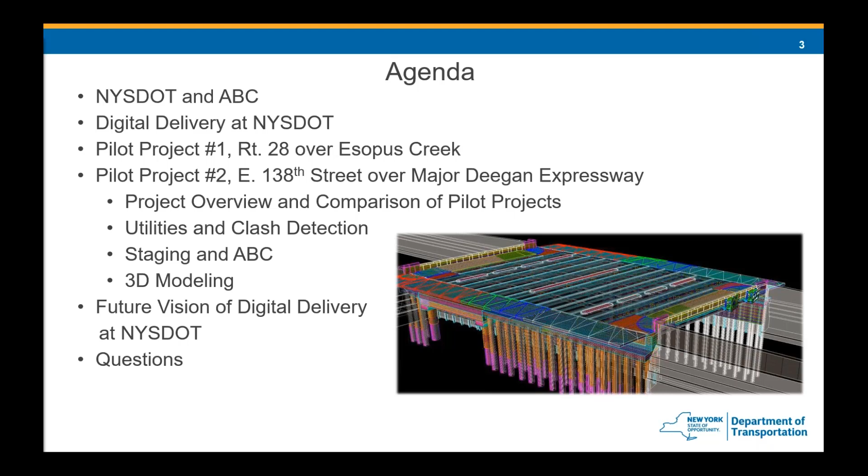On the agenda today, we're going to be talking about New York State DOT and accelerated bridge construction in general. Then we'll get into digital delivery at New York State DOT, including two pilot projects. The first one was Route 28 over Esopus Creek, which is now completed, and Brenda Crudele will be presenting on that. Then we'll get into pilot project number 2, East 138th Street over the Major Deegan Expressway, which is currently in construction. Julianne will talk about a project overview and comparison of pilot projects, utilities and clash detection, which is really interesting, staging and accelerated bridge construction, and 3D modeling. We'll get into the future vision of digital delivery at DOT, and then we'll open it up for Q&A.

I'd like to give first a brief introduction on the Structures Office at New York State DOT, and I always like to talk about our mission when we start off talking about structures. We do have oversight on the structural portion of the department's capital construction and maintenance programs, and we are always focused on safety.

New York State DOT is located in New York, of course. New York is in the northeast quadrant of the continental US. There are 11 New York State DOT regions. The main office, New York State DOT Office of Structures, is in Region 1 in Albany, New York, and we do have oversight on all the other structural portions throughout New York State. New York is unique in that it borders not only the Great Lakes and Canada, but also the Atlantic Ocean to the southeast.

Within the Office of Structures, there are 4 distinct bureaus that I have oversight on. There's the Structures Design Bureau, which Brenda Crudele leads. It's staffed with about 60 engineers and technicians, and they design a variety of structures from simple to complex, not only bridges, but also culverts and various other structures. Then there's the Structure Specialties Engineering Bureau, where Brenda Crudele is right now doing double duty, and that's essentially our construction bureau. We have our metals unit, fabrication and construction, concrete fabrication and construction, handling construction issues in the field, and also our hydraulics unit.

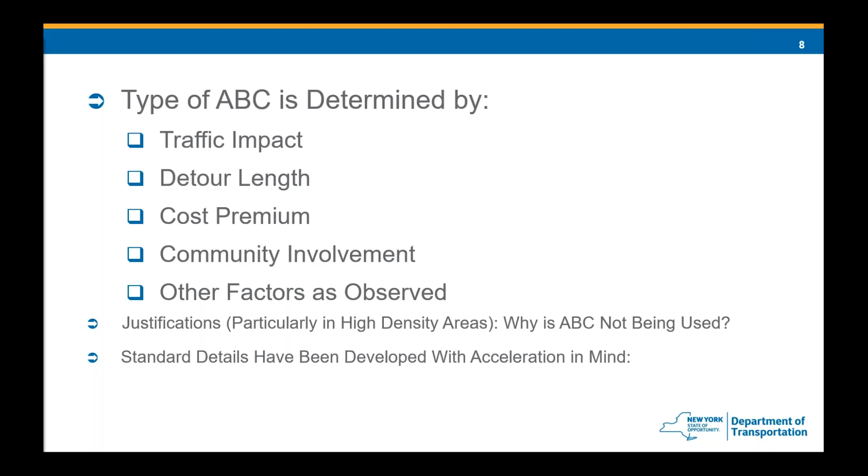We have developed standard details with acceleration in mind, and we'll go through some of those details now. Probably one of our preferred details is the integral abutment standard.

What makes this accelerated is that compared to a conventional cantilevered abutment, you don't have a footing, it's rectangular pours, we don't have to deal with pedestals, and it's very straightforward construction. You put the piles in and do a few pours, put the beam in, and then you're onto your deck and approach slab. So through reduced pours, it accelerates construction.

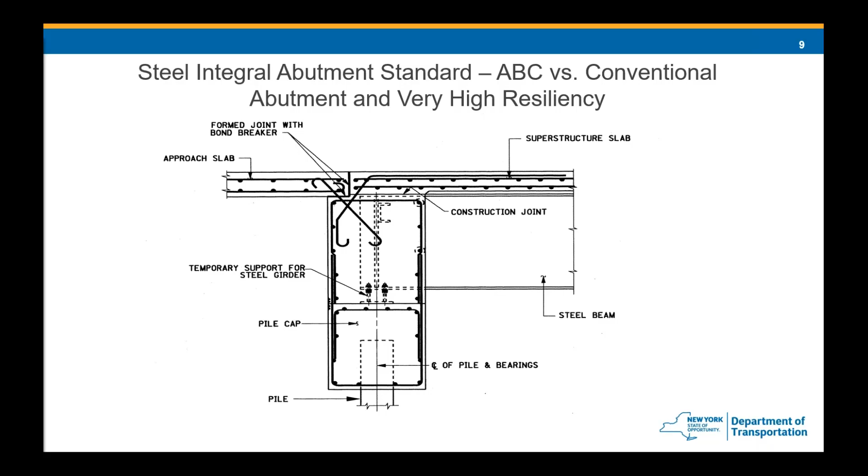What's very nice about this type of construction, and why we like it a lot in New York, is that hydraulic failures are our leading cause of bridge failure in New York State by far, and this is a very resilient structure. The superstructure is tied into the substructure, and it's been proven through flooding events to withstand those very well.

They are set, and then there's a closure pour put in place. Typically we will diamond grind, do a UHPC closure pour, diamond grind, and put longitudinal grooving into the deck at that point.

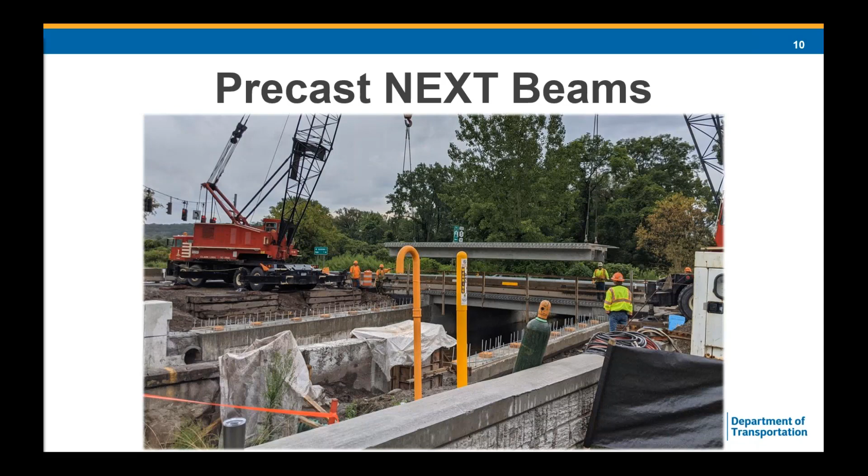You can note, and I'll show this in a separate picture, how tight those joints are at the connection areas where the UHPC will go, due to the inherent nature of UHPC bonding so well. We can use shorter bond lengths for the rebar development lengths, and then use tighter closure pours.

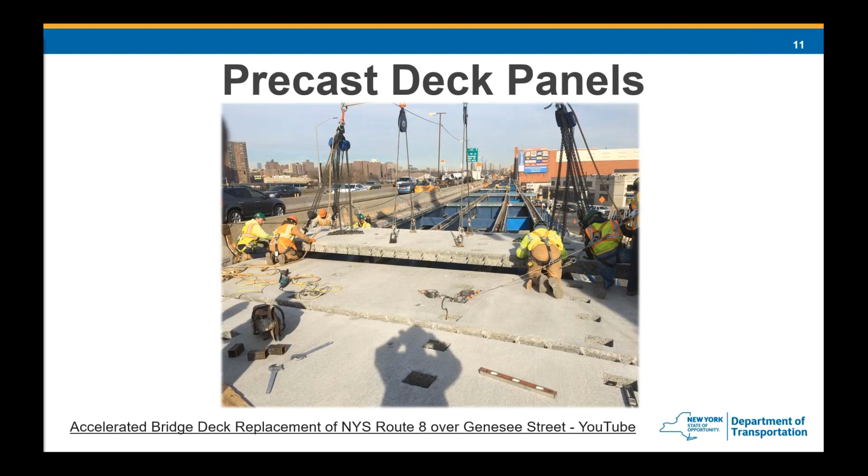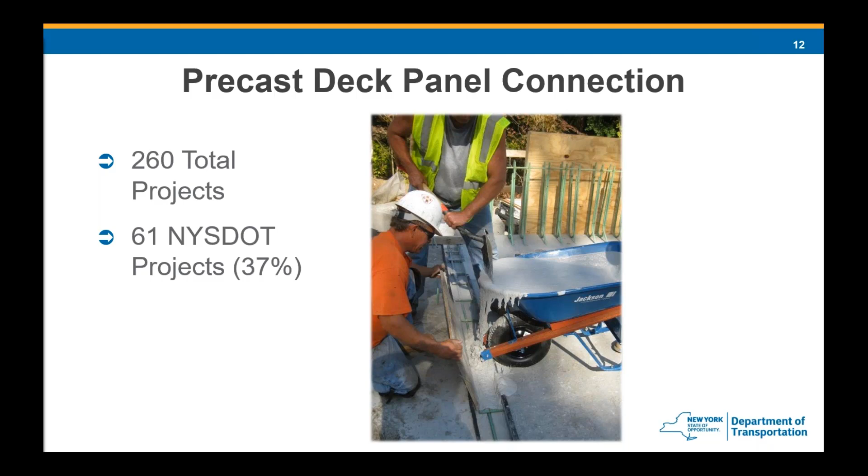They're delivered to the site and erected in a similar fashion as the NEXT beams, where they're set side by side and closure pours are put in place. Typically we diamond grind, longitudinal groove, and then we're ready to go.

One of the more unique accelerated bridge construction things we've done in New York, which is kind of neat to highlight, is our roll-in or slide-in superstructures. We've done a few of these. It requires assembly adjacent to the structure, and the ability to construct and demolish under traffic or additional closures.

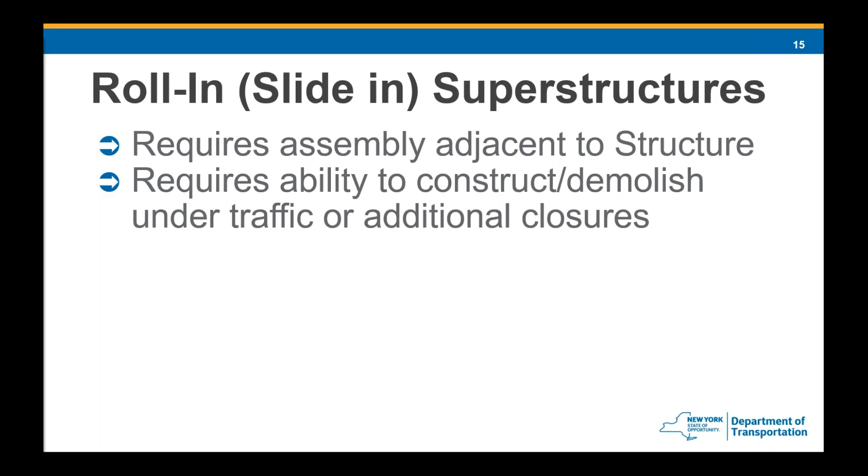They kept one direction of the interstate open while they diverted traffic onto a state route around this project on the weekend. There was a lot of public information outreach ahead of this. It was very successful on both slide-ins, and each project was completed in a weekend.

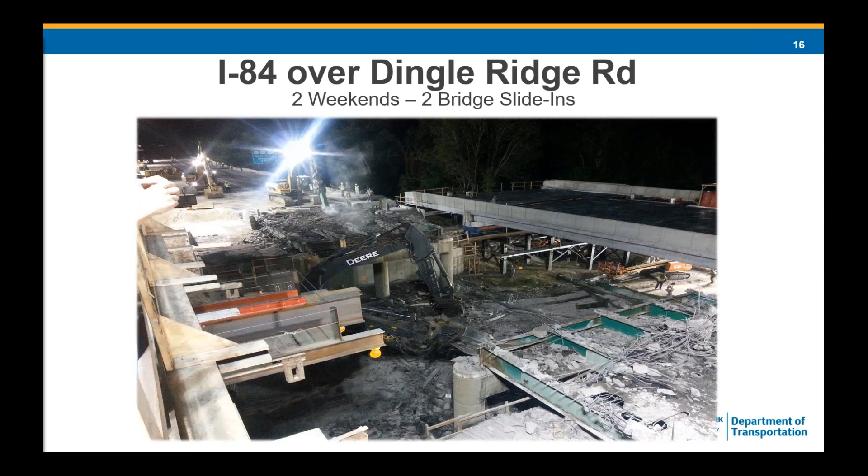Thanks, Jim. So now we're going to jump into digital delivery at New York State DOT. Starting off, what is digital delivery?

We're all very familiar with the current process of how in design we model our bridges and highways, we create 3D models, and we use that information to create our 2D PDF plans that the contractor uses to bid on. They bid on that information, and then a lot of times they recreate their own three-dimensional information from the 2D plans to construct the project.

So what digital delivery is for us, it's being able to specify contractual work with a variety of relevant electronic files. So instead of taking our smart information and dumbing it down and flattening it to plan sheets, we're making the electronic information models the legal contract document and giving that directly to the contractor.

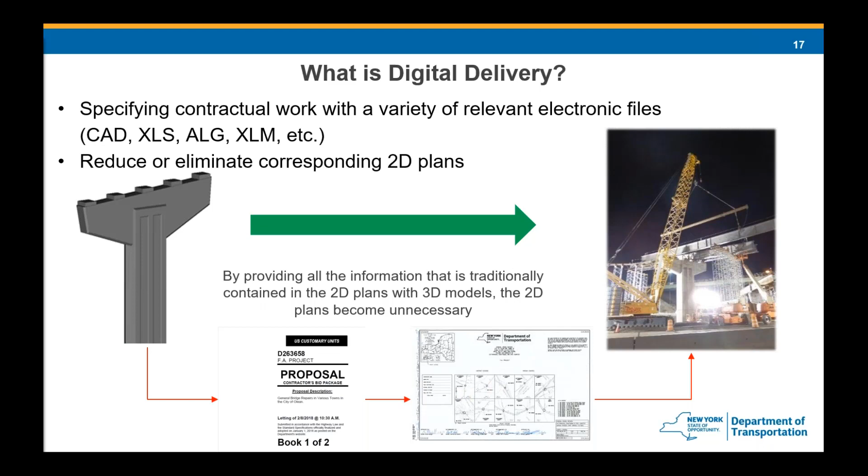We started this at New York State DOT back in March of 2018, where we formed our model-based contracting committee with the following objectives: we wanted to see what other states were doing, identify issues we'd see with progressing a model-based contracting project at New York State DOT, determine our goals, and attain executive approval to move forward.

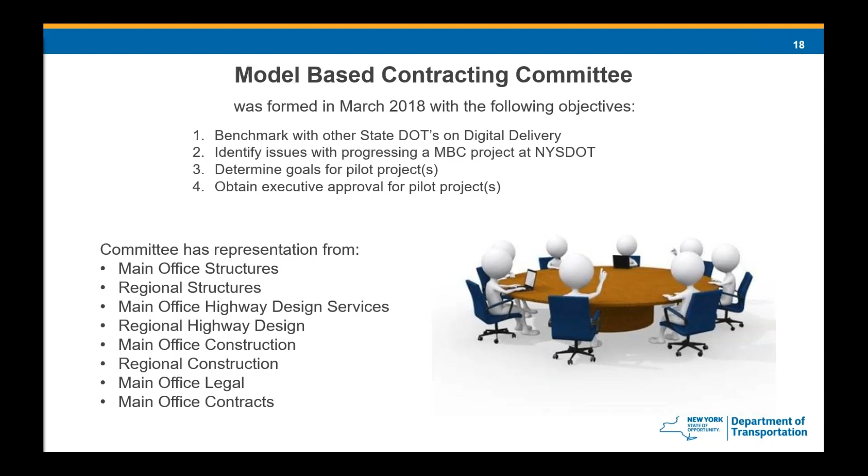One of the big things I like to point out is that we had representation on the committee throughout the whole department. We had main office and regional staff involved, staff from structures, highway design, office of construction, our legal folks and our contracts folks were all involved in the committee so that everybody had a say in what we were doing.

The two goals we had for our pilot projects: the first is to create a process to include the models as the legal contract document. That's something we've accomplished with our first pilot project. We like to check that one off — we always like to finish things in committee, so that's something we've accomplished.

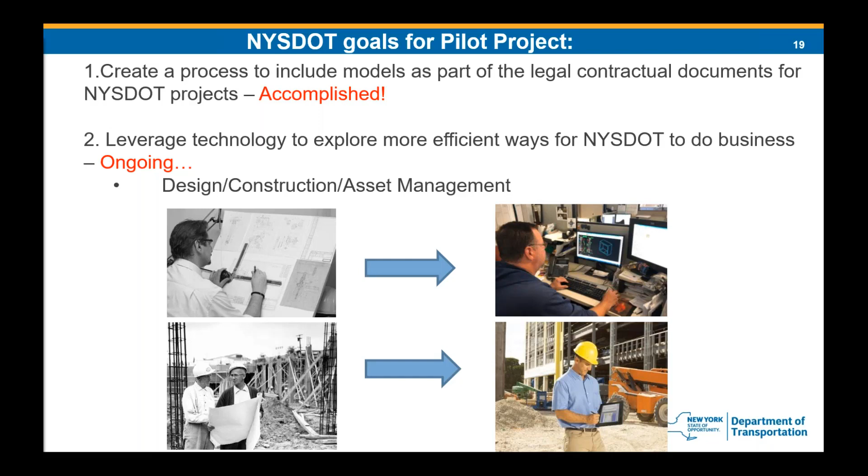Our second goal was really to leverage technology to explore more efficient ways for us to do business. That's not as easy to mark as checked off — it's an ongoing goal that continues to change, and we're really looking to focus on moving our information from design to construction and then into asset management.

Our first pilot project was the bridge replacement of Route 28 over the Esopus Creek, located in the Catskill Mountains in Lower New York. Our design schedule took place in 2018 and 2019, it was awarded to the contractor in 2020, and construction took place in 2020 and 2021.

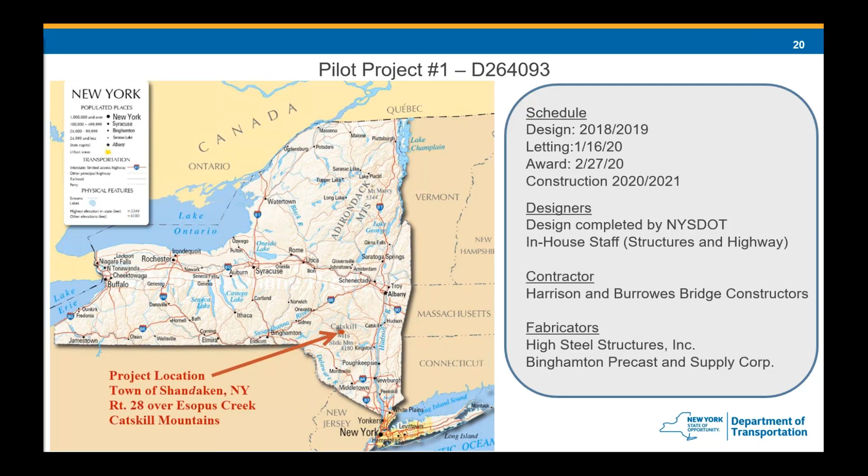I like to point out that the design for this project was completed with all in-house staff, both structures and highway design. We really wanted to dig in and learn the digital delivery process and develop it ourselves. A lot of other states have hired consultants to do that work for them, but we really wanted to lead the effort internally at DOT.

So you might ask yourself, how do we make that information model the legal contract document? We went about this in a pretty simple way — we changed the definition of the term 'plans' in our contract. Currently, the definition of plans is the official contract drawing, which shows the location, character, dimensions, and details of the work to be performed. That's in all of our contracts.

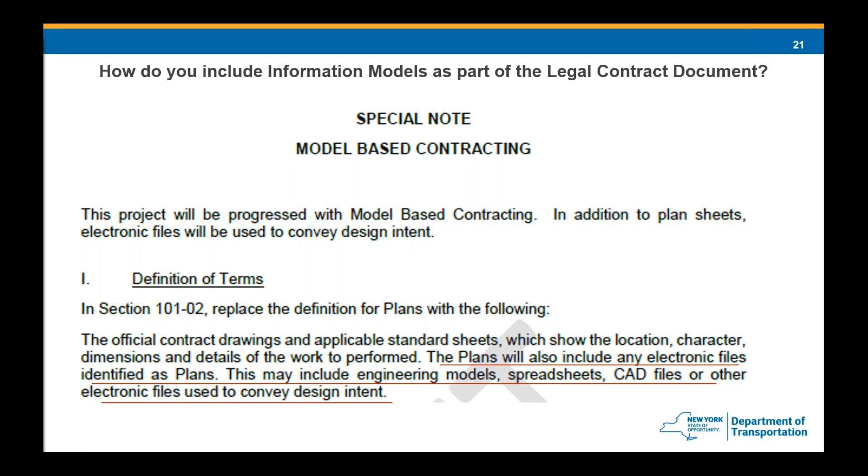What we added for our digital delivery contracts is that plans will also include any electronic files identified as plans — this may include engineering models, spreadsheets, CAD files, or other electronic files. The idea here is we wanted to leave ourselves the flexibility to specify any electronic file we wanted as the legal contract document.

So what we did is we looked at all of the components of a project and asked ourselves, what is the most efficient way to transfer this information to the contractor? So you have plan sheets, physical models, or data models. Looking at all the information we give to the contractor, we decided that all three of those are good ways to transfer different information.

So we ended up taking a hybrid approach with our project. We looked at each component and essentially did a return on investment of what is the best way to provide that information. The example I like to pull out and show is bridge railing.

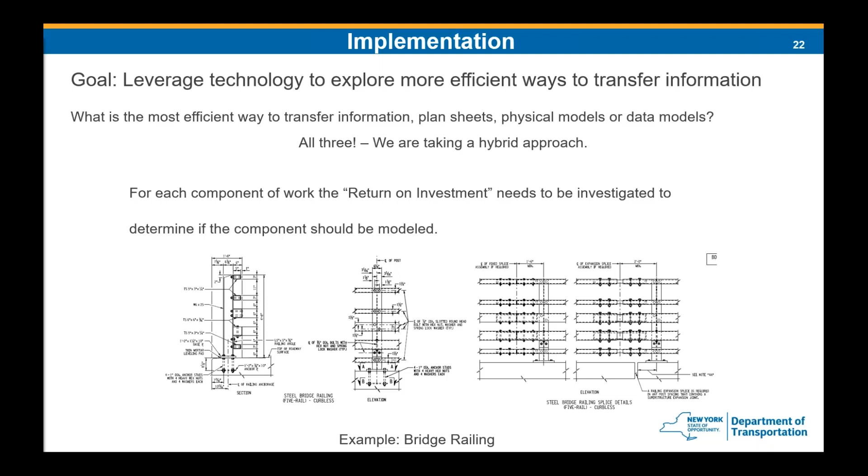We have standard details for our bridge railing that our fabricators have been using for decades. We could take the time and model every nut and bolt on that railing, but they're just going to go back to our standard sheets anyway. So we didn't feel that was a good use of our time to model that when we know they're going to use our standard detail anyway.

On the highway side, all the project geometry, horizontal and vertical and super, all the highway corridor, the pavement, sidewalk ramps, all the earthwork quantities, and then our utilities and closed drainage.

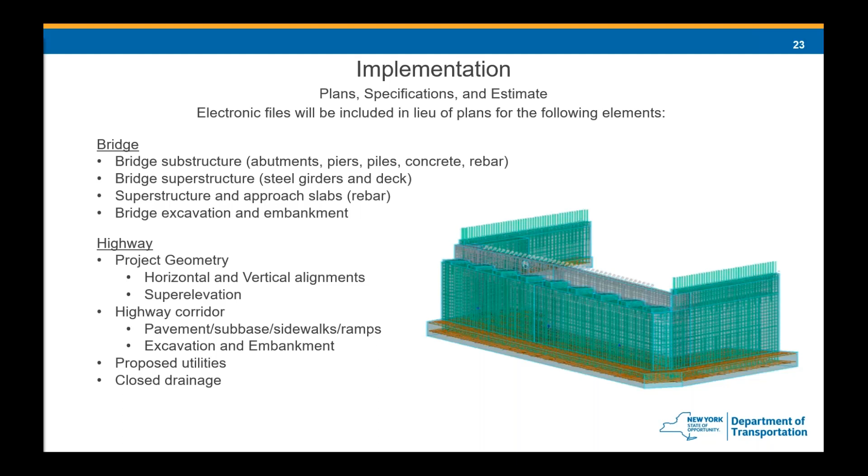The components of the project that we thought were still a good way to transfer information is plan sheets, title sheets, PE stamps, index, notes, tables, right-of-way, railing details. So we went through and these are the things that we still delivered as plan sheets to the contractor.

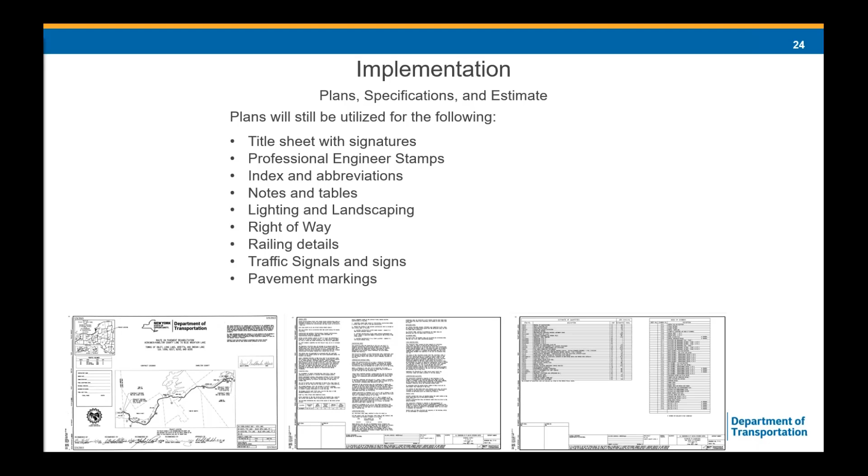So how did we essentially assign files to be electronic files identified as plans, like we said in the definition? We ended up having a new plan sheet that we added to our set, called electronic files identified as plans. We listed out each file that was contractual, and most importantly, we added a date and time stamp for each file. There was a lot of discussion on how you know whether you have the right file. This is how we addressed that - each file came with that date and time stamp, and it had an engineer of record along with it.

We also included a special note with our projects. You can imagine that if you're looking for certain information on the bridge, you know where to go in the plans to find it - you don't need special instructions to tell you where that is. But in a model, this is all new to everybody.

So what we did was we went through and gave specific electronic file content for each of the following components of the bridge.

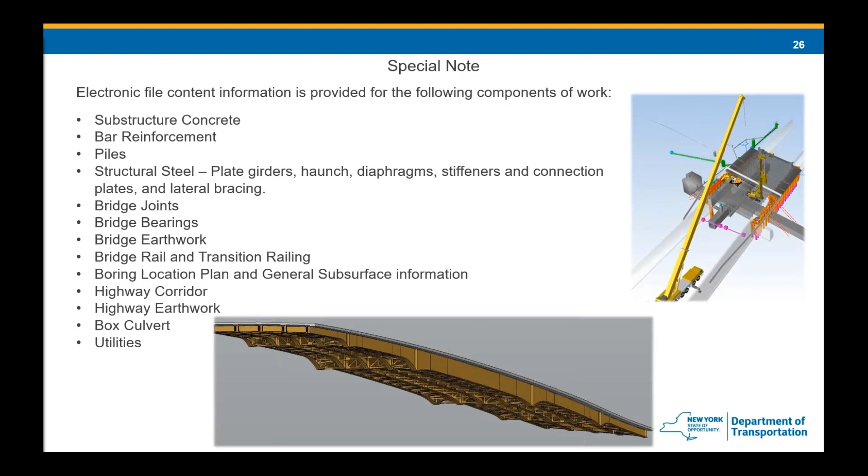One example I show here is for the structural steel. So what we do is go through and essentially tell them what information they can find in the model. In this case, girder plate thicknesses, plate lengths, diaphragm types, gusset plate thicknesses - that information is all included in the model. But almost more importantly is the information that you can't include in the model.

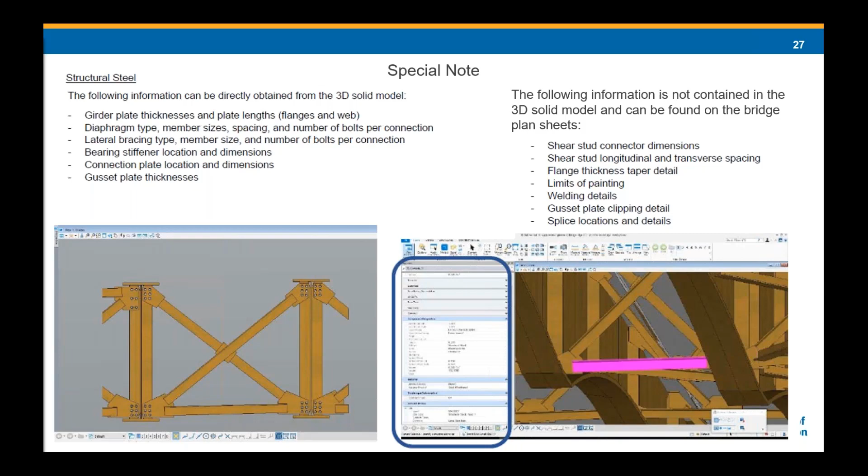Stud shear connector dimensions and spacings, welding details, splice locations were not included in the model, and those were provided on plan sheets. So we found it was very important to include this special note for all the components of the bridge so that people can find the information that they need.

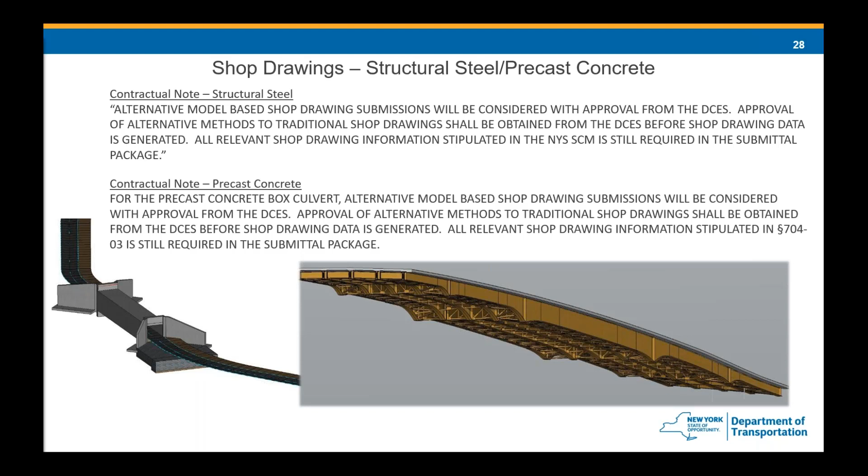One thing we were looking to see was if the fabricators were also interested in model-based shop drawings. This project had the bridge, and we also had a precast culvert in the contract. So we included a note in the plans that allowed the fabricator to submit model-based shop drawings back to us if that was their preference. It turned out neither fabricator did that. We got standard 2D shop drawings, but we did allow for that innovation if the fabricators were ready for it.

So how do we end up delivering the same information in the model as we would in the plans? The contractor still needs all the same information, we're just delivering it and packaging it in a different format.

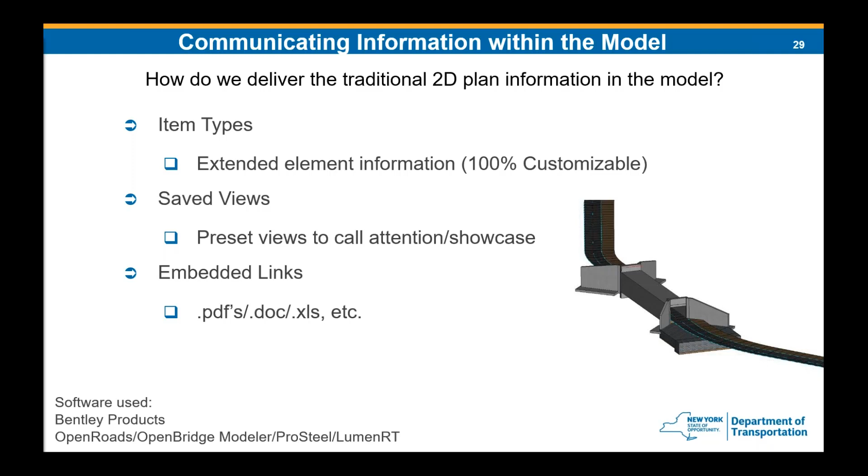We did this three different ways throughout the model. There's a function called item types, which allows us to attach metadata to information within the model. We had saved views, which allows the user to call up preset views. And then we had embedded links attached to other files.

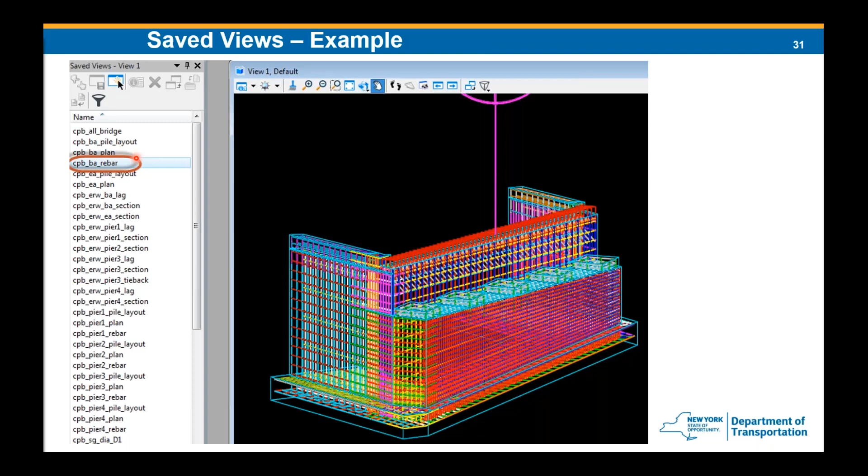The next is Saved Views. When you jump into this full model, it can be overwhelming, there's a lot going on. So being able to pick out a particular view where it turns everything else off in the model is super useful. Here you click on Begin Abutment Rebar, and now you just have the begin abutment and the rebar in that, so you don't have to be distracted by everything else in the model.

So I want to talk briefly about contractor outreach that we did for our first pilot project. We knew this was very different for our contractors, and we wanted to give them a heads up and make sure they knew it was coming. So we had 4 in-person meetings that were simultaneously webinar held prior to the advertisement of this project.

Our plan specification and estimates were due into our Design Quality Assurance Bureau at the end of September 2019. One of the most important things we did for this project is we posted our PS&E information online on our contract website prior to advertisement, about 2 months prior. Based on our AGC meetings, we let everybody know we were going to do this. This gave contractors an extra 2 months to see the files, become familiar with the project, and they could have started estimating 2 months earlier if they wanted to, prior to the actual advertisement of the project, which was in December 2019.

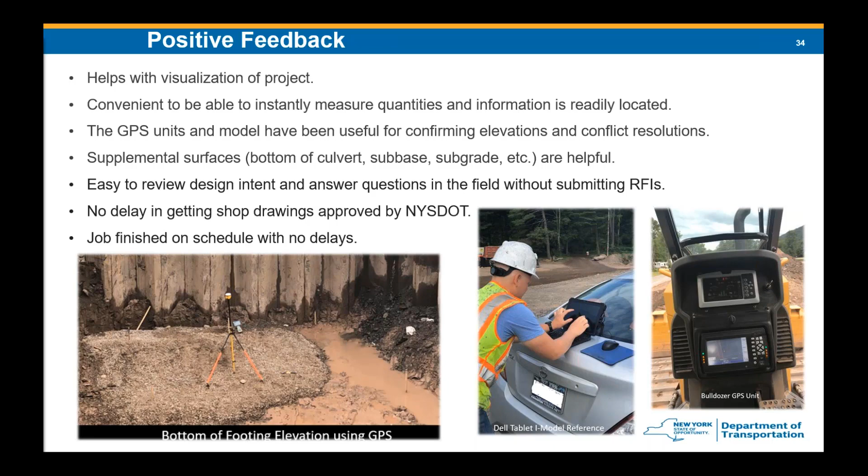The GPS units they used were great for confirming elevations and resolving conflicts. The supplemental surfaces, like bottom of culvert, sub-base, subgrade, were really helpful and went into the machines very well. We were told it was easy to review the design intent and answer questions in the field without submitting RFIs. We saw no delay in getting shop drawings approved by New York State DOT, and the job was finished on schedule with no delay.

Some of the lessons learned that we had: we found out that Bentley is not completely interoperable with AutoCAD. Some of the fabricators were using AutoCAD instead of Bentley, which is what we used for our information models. We found that bouncing back and forth between the model and the plans can be confusing.

There is a lot of information provided in this contract, and again, we weren't sure if all of the information was being fully utilized because there was a lot of information. The contractor was very interested in more than just a finished grade model.

They would have been more happy with a construction staging model and different sequences. So once they got into using the surfaces, they really liked those. One thing that we heard was the deck cross slope is not very easy to get out of that model, and some software with the capability of cutting cross sections would have been really helpful.

We found too that we need construction staff out there that are comfortable with reviewing and using the model to obtain information. We knew that going in, and we made sure to staff accordingly out in the field, but it was very obvious that construction staff need to be able to use the model.

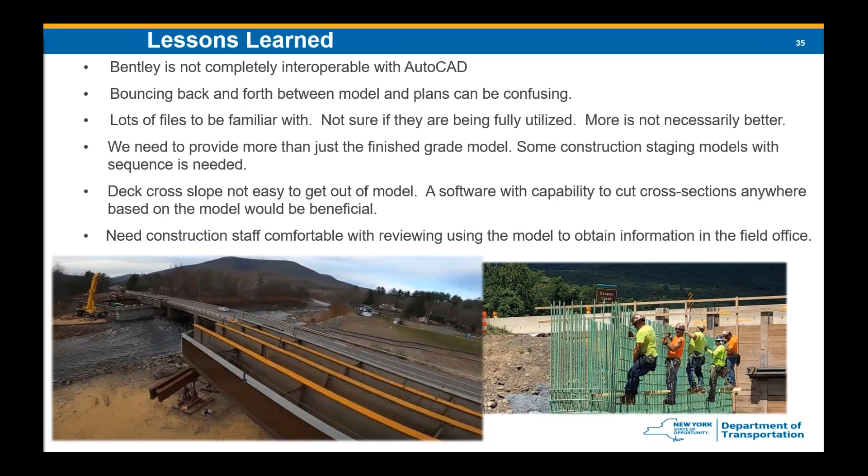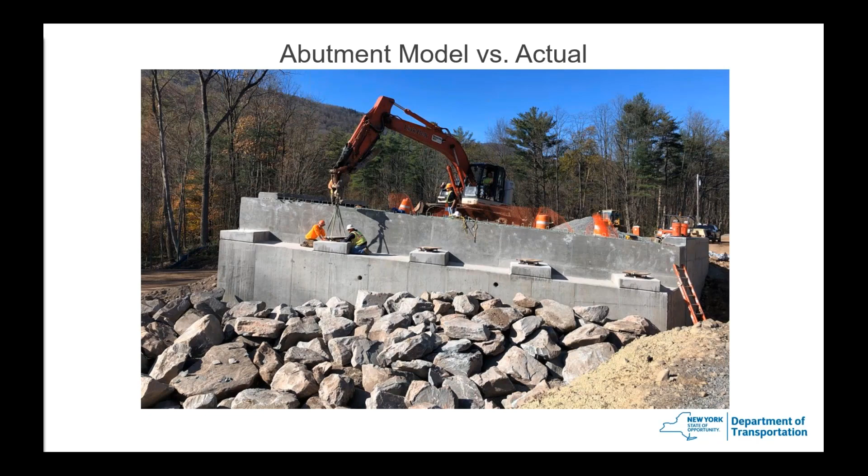So we like to call this project our proof of concept. You can say that the project was biddable and buildable. We got the product that we wanted out of this. Like I said, we came in on time and on budget, so we were very happy with the completion of our first pilot project.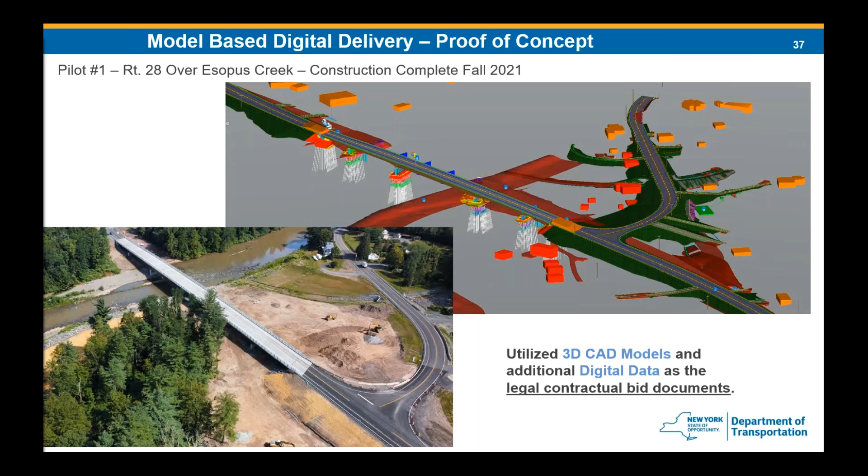Good afternoon, everyone. Now I'd like to switch gears and talk about our second pilot project, for East 138th Street over the Major Deegan Expressway. So as you can see, I like to show this photo that compares our two pilot projects. The Route 28 over Esopus Creek, you can see it's a very rural setting, with a lot of space for staging, for work zone, everything here.

And then looking at our second pilot project, very tight quarters. There's a lot of utilities and staged construction that really mandated the use of accelerated bridge construction techniques for this project, where we used modular deck beams.

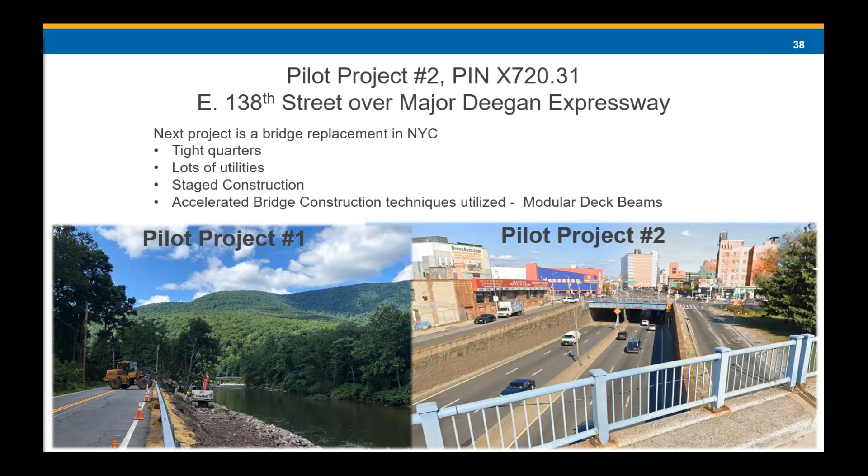So here's an overview. This is located down in New York City in the Bronx. The design schedule was designed in 2020. Contract was awarded middle of 2021, and construction has begun and is expected to last through 2024.

And just like our first pilot project, we're very proud to say that this bridge replacement was designed with in-house staff, with the Office of Structures and our Office of Design for the Highway Group. But we did bring on a consultant to help with the utility relocations for this project.

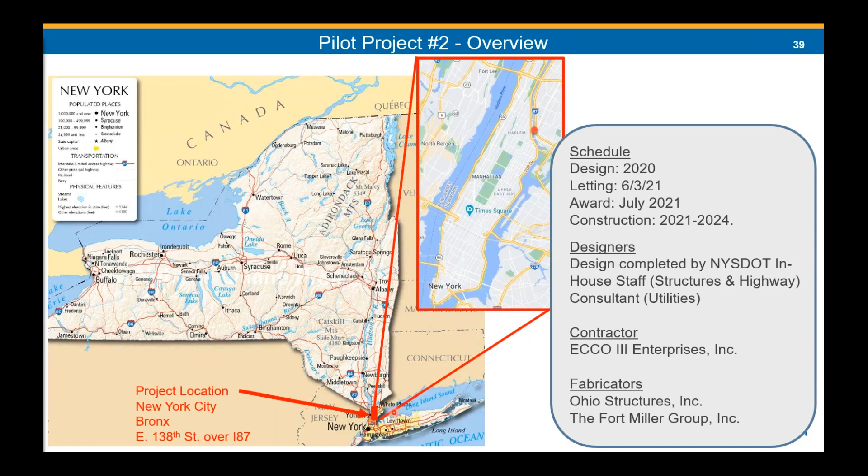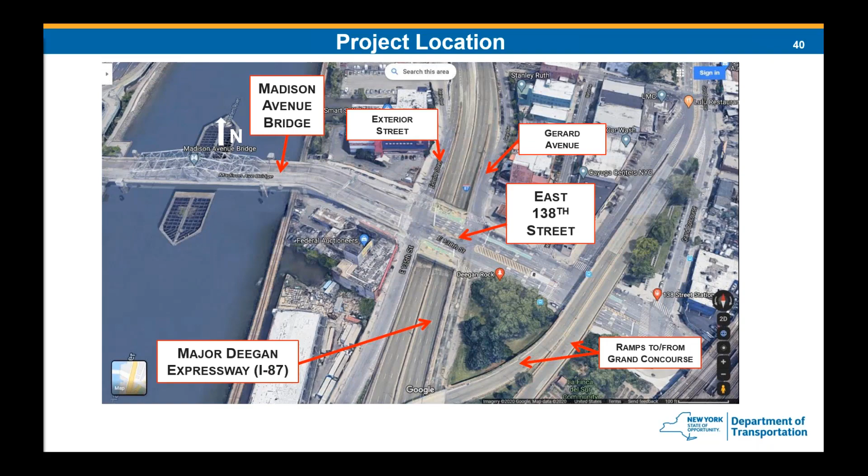So here's an aerial view of the existing bridge. This is East 138th Street. It crosses the Major Deegan Expressway, and it is just 25 feet from the approach to the Madison Avenue Bridge, which is one of the few free entry points into Manhattan, seeing more than 150,000 vehicles per day.

The existing bridge is a two-span steel girder structure built in 1938. The existing bridge has very limited vertical clearance over the expressway and has been hit numerous times. So the project goal here is to replace the existing bridge, eliminate the pier, and increase the vertical clearance.

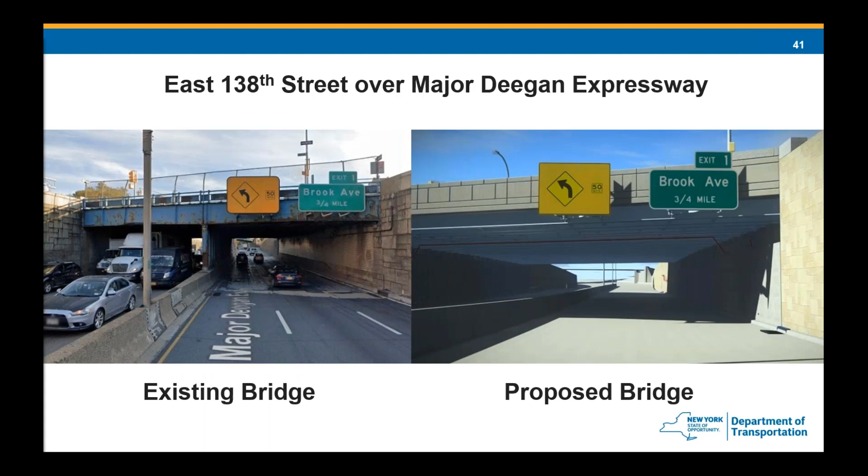And this must be accomplished all while providing for pedestrian access, keeping all lanes on the bridge and abutting intersections open during construction, limiting impacts to the various utilities, and providing aesthetics that tie into the historical character of the surrounding area. The second pilot project was challenging from nearly every aspect, and it really was an ideal candidate for model-based contracting, given the amount of coordination and clash detection that is necessary for a project of this scale.

With so many site constraints and strict geometric controls, the East 138th Street Bridge may look very uncomplicated at first look. However, there are many complex traffic, utility, geotechnical, and structural design challenges that needed to be overcome to ensure the success of this project.

So here is our bridge. It is actually much wider than it is long. It provides for accessibility to 6 lanes of traffic, along with bike paths and sidewalks to accommodate the high pedestrian demand in this area.

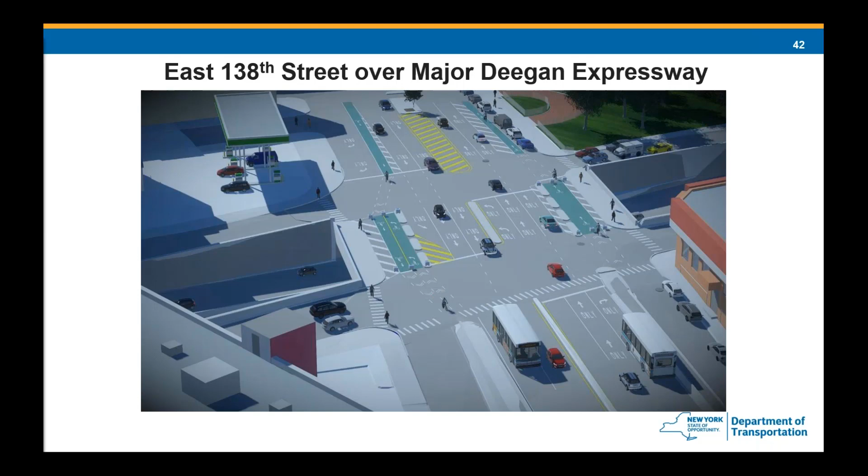The site is equally congested below ground as it is above ground, with a very complicated web of utilities. Really, there's every type of utility imaginable within the project limits.

So you can see this is our bridge here, with our girders running in this direction. We have utilities carried across the bridge, including a combined sewer that runs below the abutment underneath the expressway to the other side of East 138th Street. We're going to go into a lot of detail later on about just how challenging it was to accommodate that sewer.

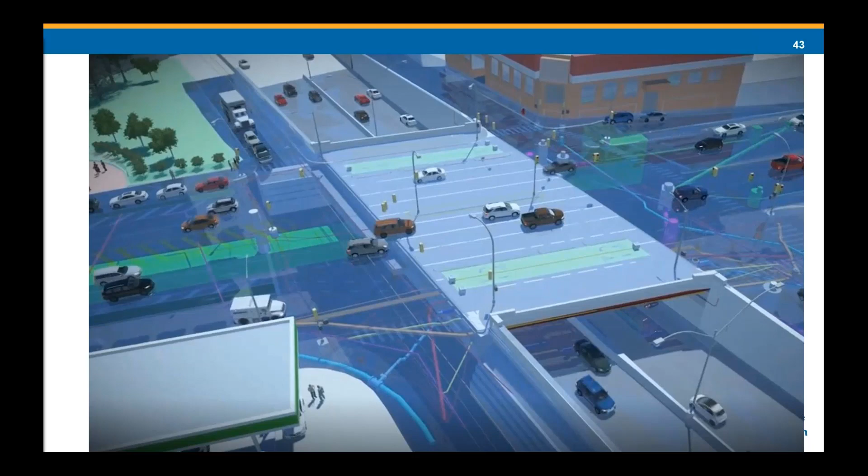Let's talk about some of the differences between our two pilot projects. The design for Route 28 over Esopus Creek, that was our first project, was designed in 2018, 2019, and construction was completed in 2020, 2021. During construction of our first pilot project, we started design for our second pilot project, and like we said, our East 138th Street project is currently in construction.

Route 28 was built in a very rural area with no underground utilities, in comparison to East 138th Street, a very congested urban environment with a sophisticated web of underground utilities. On Route 28, we only had two different agencies to coordinate with, versus down in New York City, where we had over 10 different agencies that needed to be coordinated through design and construction. Route 28 was built using a single work zone traffic control stage, while East 138th Street had over 10 different work zone stages to build the entire project.

And finally, one of the major differences between the two, like Brenda mentioned, for Route 28 we modeled all of the structural steel in 3D and transmitted that as contractual information to the fabricator.

One of the major changes we made was based on lessons learned. We reached out to the fabricators after the project was completed, and one of their recommendations was that they were very hesitant to use the 3D model for fabrication of the structural steel. In the 3D model, you need to go in and measure everything—flange thickness, flange transitions, plate widths, etc. So we heard them loud and clear, and because our second pilot project was in design during construction of the first one, we were able to make this change. We ended up using Excel spreadsheets to convey the contractual information for the structural steel on the second pilot project.

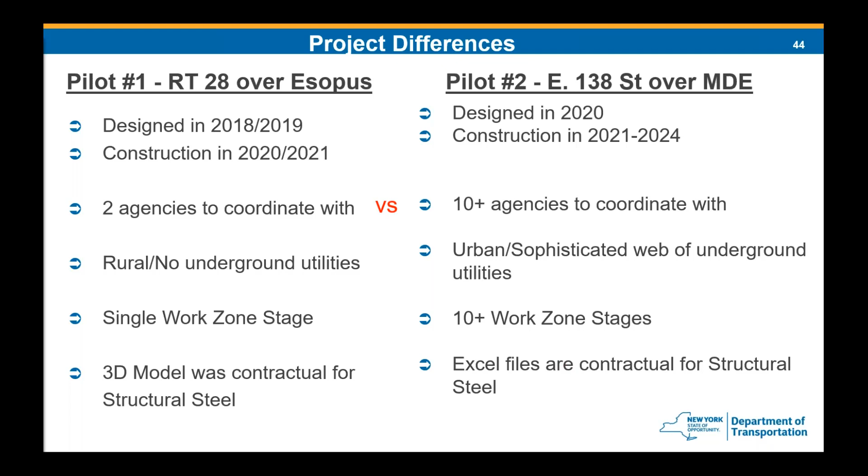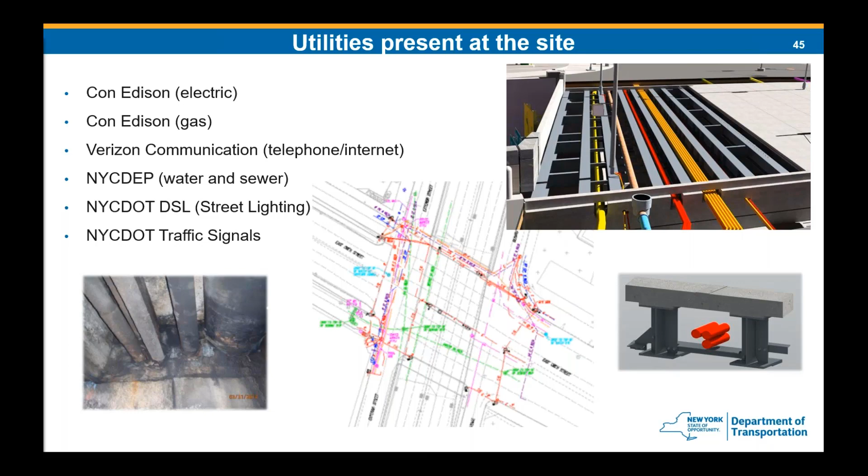Really what was very beneficial was using digital delivery for this. This is a conventional view, maybe what you'd see with utilities shown in 2D plans. At New York State DOT, we show all of our utilities in color to help bring out that line work so it's not lost with leader lines or other component information on the drafting plans. But even though they're shown in color, and you're not going to miss them, it's still very difficult to see where these are in relation to each other in space.

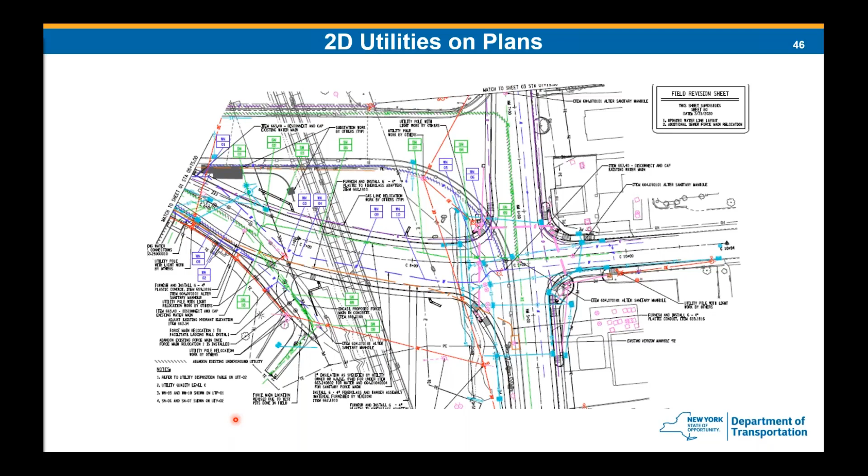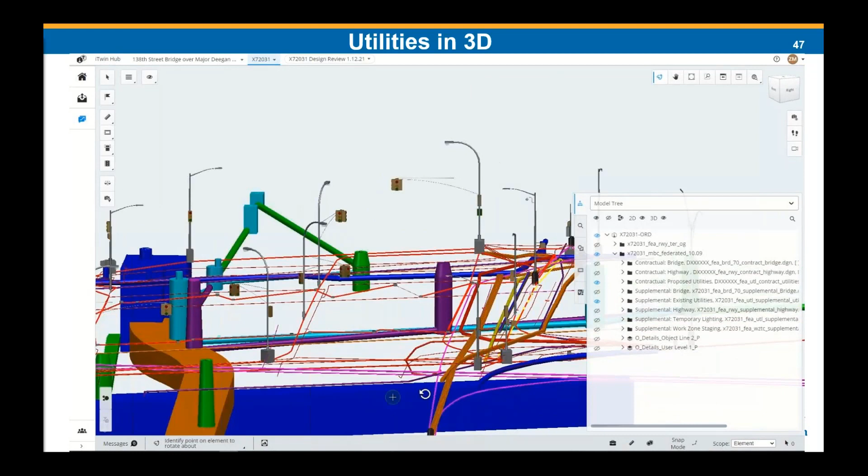So looking at how we modeled all of the utilities in 3D for East 138th Street, you can see we start with our overall 3D model, and you can start turning off different levels to really isolate the structural components you're looking for and the utilities, showing their locations relative to the bridge itself and relative to each other. This was extremely valuable for this project.

And one of the biggest takeaways that I saw as a designer being able to use 3D models for utility coordination is looking at clash detection.

So we coordinated very closely with the utility companies and the consultant on board helping us with the utility relocations. We had all of our meetings just like you would if working on a conventional 2D plan project. We double checked, triple checked our numbers, had sketches passed back and forth to review everything.

And the more conflicts and errors that we can correct in design, the less money you're going to spend and the less time it's going to take you to correct those issues rather than if you waited until the project was in construction.

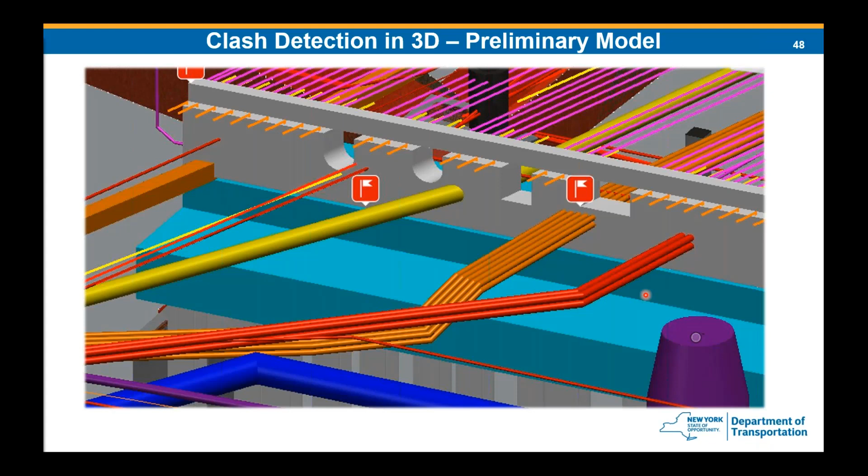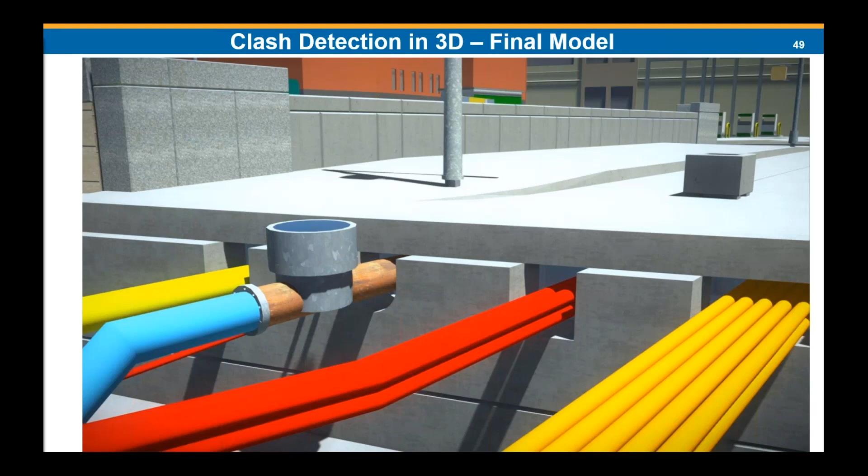Because this project is located in a tight urban environment and we had incredibly high traffic and pedestrian demand to accommodate during construction, it really proved to be a challenge for developing the staging for this bridge replacement. So what we ended up with is a staging plan that would replace the bridge in 4 independent stages over 3 years while using accelerated construction techniques.

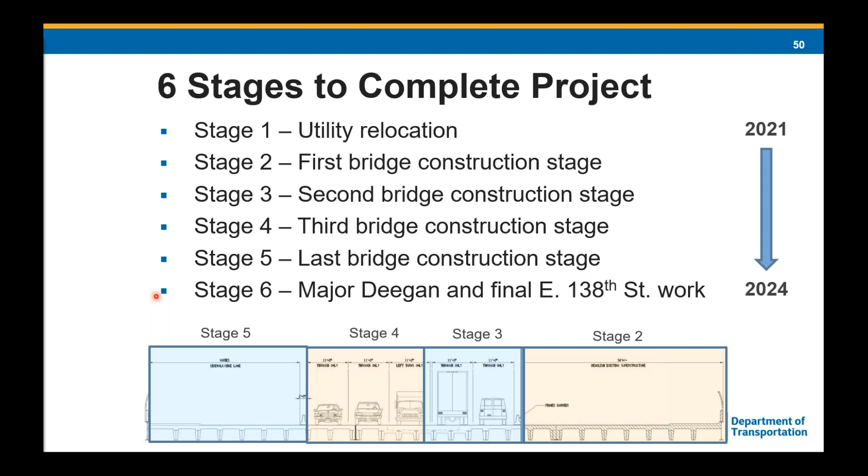So the first stage is that we're going to go out and do all of the utility relocations. Once the utilities are in their final resting place, then we can start our bridge construction, which would be completed in stages 2, 3, 4, and 5. Once the bridge is built, then stage 6 is the work along the Major Deegan Expressway and finishing any remaining highway work on East 138th Street.

So I want to talk a little bit about accelerated bridge construction and why that was very important for this project. Like Jim mentioned, any New York State DOT project in an urban environment must provide justification for why the project is not utilizing any accelerated bridge construction techniques.

And here in New York, we have a Drivers First initiative. So in September 2012, the governor initiated this new approach to prioritize the convenience of motorists and ensure that disruptions are as minimal as possible to drivers at highway and bridge projects across the state. So following our Drivers First initiative here at DOT, we decided to proceed with prefabricated modular deck beams with UHPC closure pours for this bridge replacement project.

So I know everyone here understands the advantages of accelerated bridge construction, but I just want to do a quick comparison here for the techniques that we chose for this project, and the alternative would have been conventional steel girders with a cast-in-place concrete deck.

So the first thing that we all know, it's right in the name, accelerated bridge construction. With prefabricated modular deck beams, you have very minimal cure time for UHPC versus the in-field application using cast-in-place concrete. You're going to have at least a 28-day cure time. So you have immediate savings there.

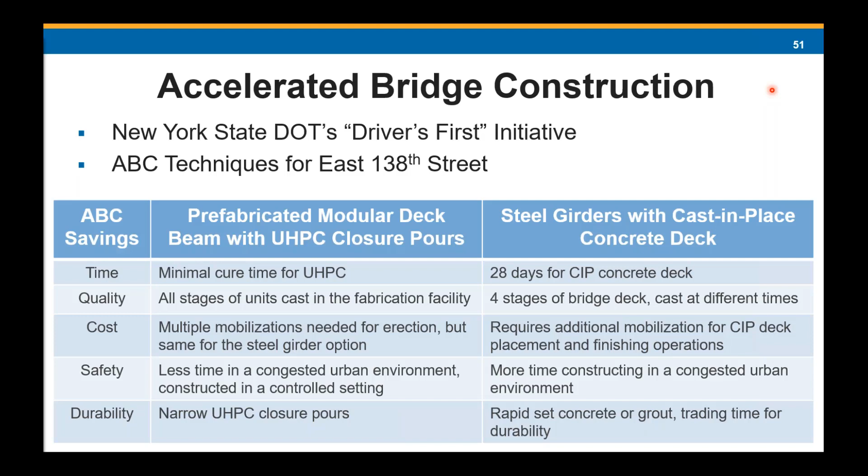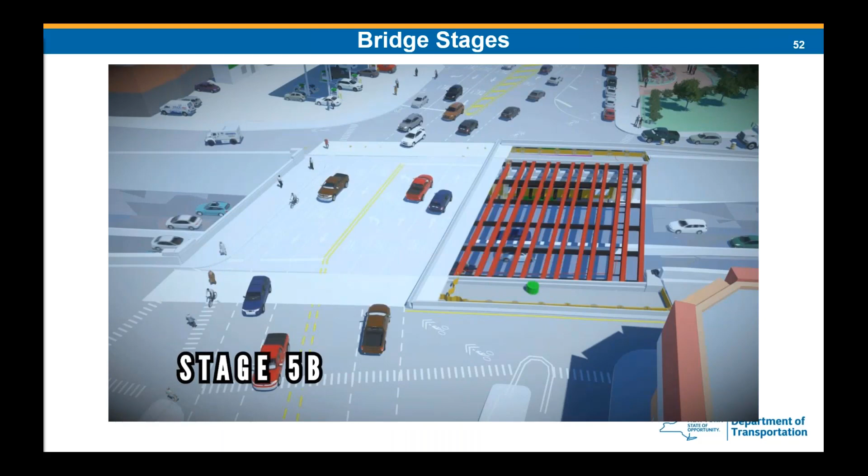Let's take a look at the staging here, the 4 bridge stages. In stage 1, we're utilizing the existing bridge to carry all of the traffic while we build the new portion. Stages 2 and 3, we're going to be utilizing traffic on existing and on the proposed structure. And finally, the last stage has the combined sewer carry beam system, which we're going to talk about soon.

Using these visualizations from our 3D models was very advantageous during the design. We were able to convey to project stakeholders exactly how traffic would be maintained, ensuring their buy-in and cooperation. The middle bridge stages were very narrow, which did add cost and construction time to the project, but it really allowed us to maintain our traffic, keeping all lanes open at all times.

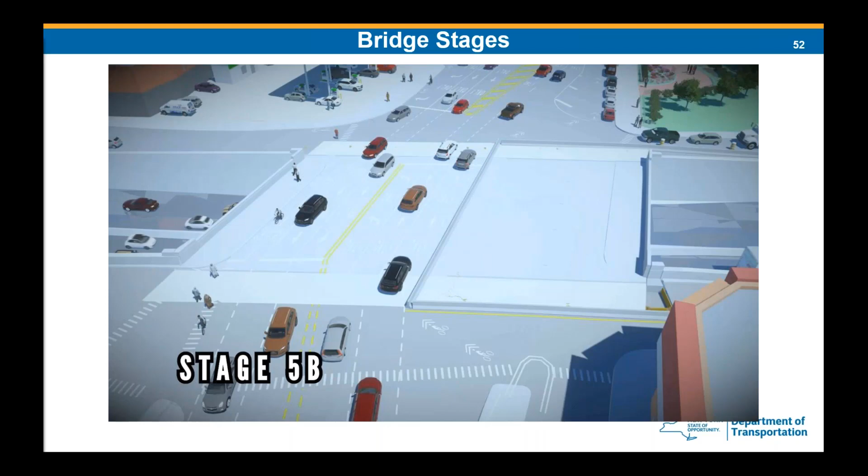Because we were using the prefabricated modular deck beams, that's 2 steel girders connected with a precast deck, then erected before the UHPC closure pours, we did actually have some locations where utilities were going to be located within a modular unit itself. So in some locations we had temporary diaphragms that were to be in place during transport and erection. Then once all of the units were tied together with UHPC and that UHPC closure pour cured, we could remove the temporary diaphragm and we had our utility strut to occupy that space.

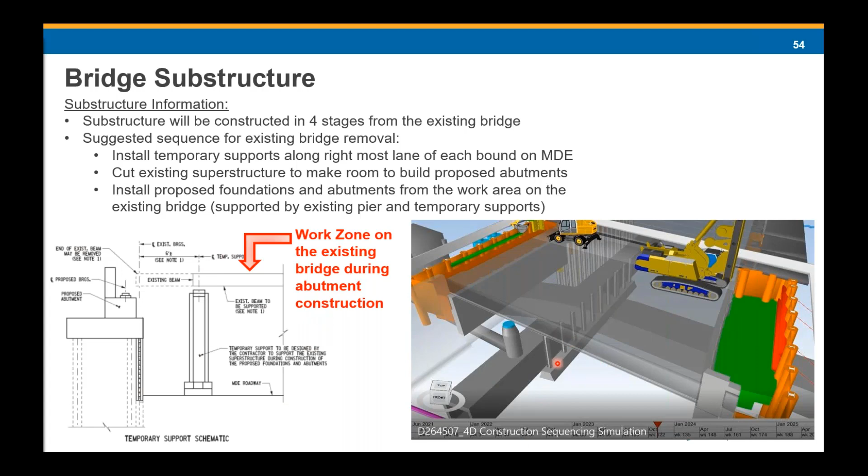Looking at the substructures and foundations, the subsurface profile was very unique, given that it was near the river down in New York City. The bedrock elevations actually varied very significantly across the project site.

At the begin abutment, we had driven solutions where the rock was much more deep. We used driven H-piles and driven cantilever sheeting for excavation support. By the time we got to the end abutment across the other side of the expressway, bedrock was very shallow, so we used drilled solutions. We had drilled shafts reinforced with an H-pile, and drilled shafts with permanent casing and rebar cages. For excavation support, we used soldier pile and lagging walls with grouted tiebacks and walers, and geosynthetic reinforced walls as well.

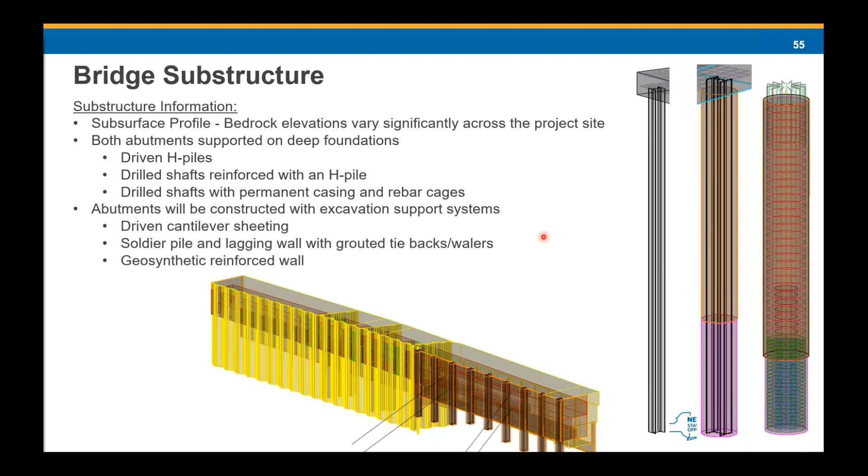One of the most challenging aspects of this project was what we like to call our carry beam system. If you remember, one of the first slides I showed you was a green combined sewer. This is a 30-foot wide sewer that runs underneath East 138th Street, dives down, crosses the expressway underneath our bridge, underneath the abutments. This was a New York City Department of Environmental Protection, DEP, sewer that could not be impacted during construction, and we could not load it at all during construction or in the final case.

Now, while that seems very challenging in and of itself, DEP actually had plans in the future to widen this sewer. So not only did we need to clear this existing 30-foot wide sewer, they had plans to make this a double barrel sewer in the future, and we needed to maintain a 60-foot wide clearance envelope in this area for them to go out in the future, after our bridge has been built and open to traffic, to potentially excavate and undermine this area, all without disrupting traffic overhead.

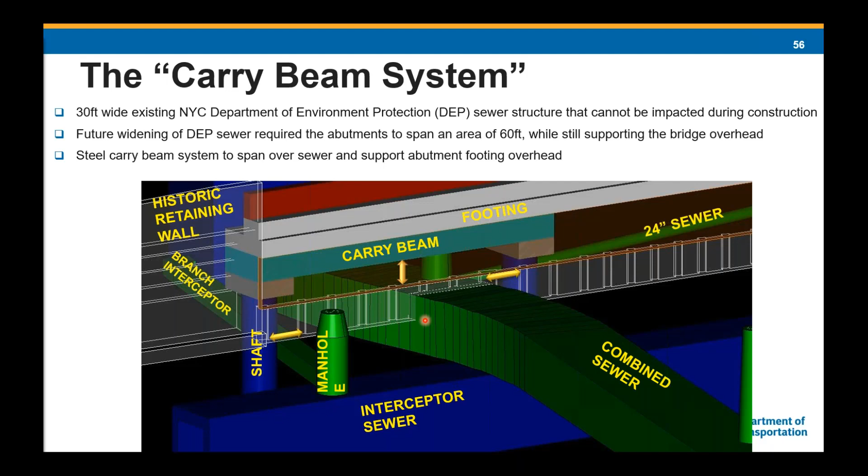So what we came up with here is this carry beam system. You can see here we have a 3-beam system in cross-section. We have diaphragms, we have lateral bracing as well, and we have these lagging piles that are hung off of the fascia carry beam, and these are going to act as earth retention devices.

Here's a rendering of our 3D model. Again, this is the length of our abutment. Our bridge is crossing overhead in this direction, and the sewer is going to be underground in this direction. So we have our 3-beam carry beams that are going to take the load of our abutment and transfer them to drilled shafts. And then we have these lagging piles that are hung to retain the earth in this area. One aspect that was very challenging is that this carry beam system not only had to be designed for gravity loads, but also for lateral earth pressure. So that was very unique.

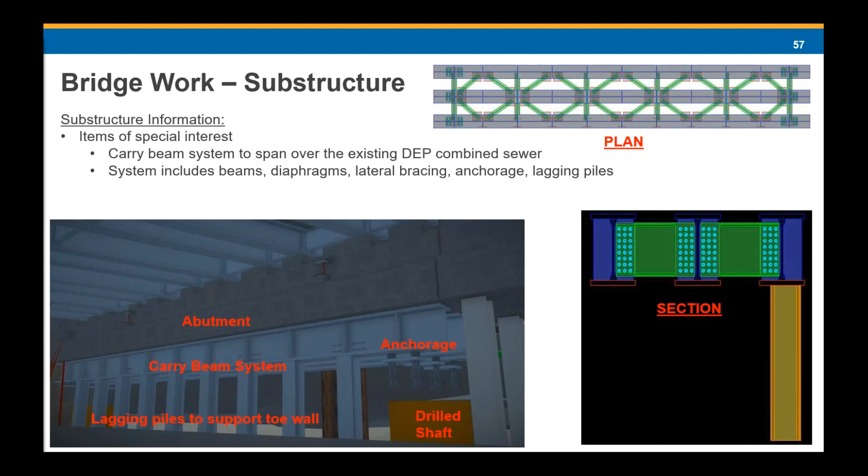Let's look at a rendering here. Again, this is our 30-foot wide existing combined sewer. This is a branch interceptor sewer, and the combined sewer is going to be 60 feet in this direction. So this is the area that we had to span. This shows our temporary excavation support, so we utilize a soldier pile lagging wall. We have our soldier piles, our timber lagging, and we have walers, braced excavation with tiebacks going in and out of the screen.

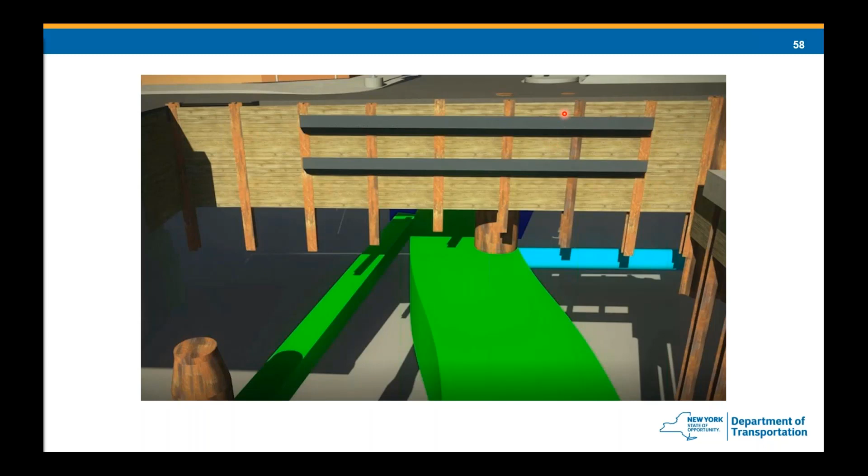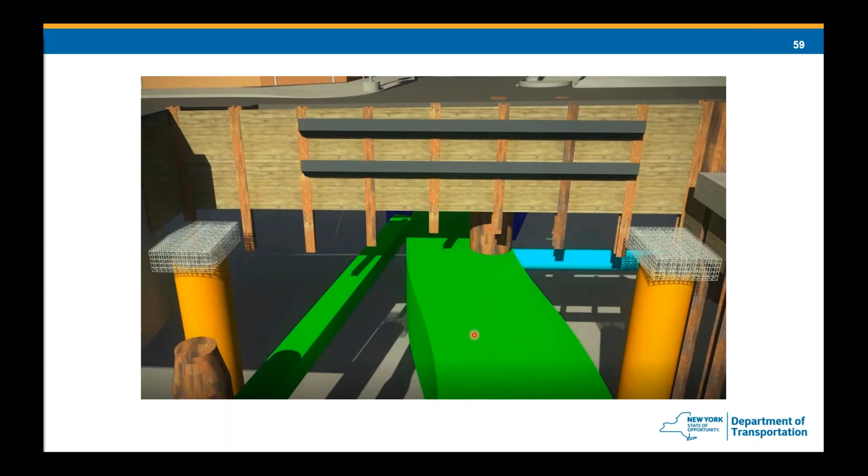The first thing we do is we install 2 drilled shafts with a concrete pedestal on each side, and this is really going to be the limits of our clearance envelope. So our carry beam system will be supported by these drilled shafts and will span over this entire area. The sewers that are shown now are existing, and we've left them plenty of clearance envelope for a future widening.

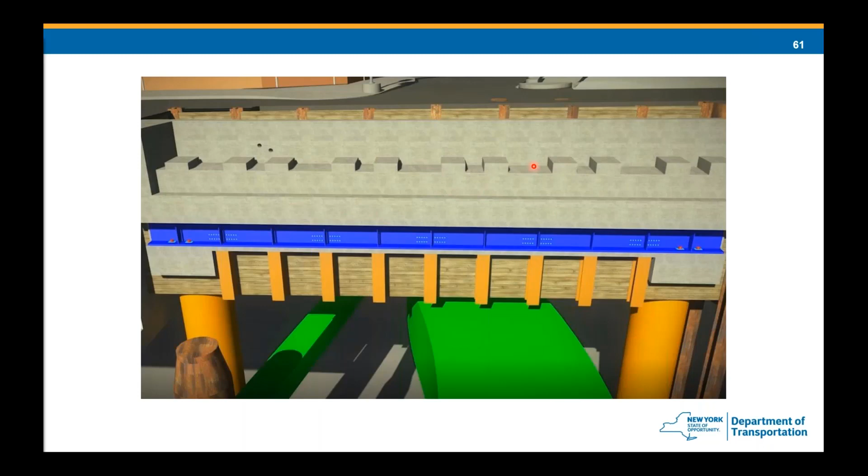So the carry beam system is shown in blue. That is placed. We have our lagging piles that are going to hang from above, not impacting any of the sewers underground. The carry beam system is then encased in concrete, and the proposed abutment is poured on top. So we have our footing, our stem, and our pedestals for our prefabricated modular deck beams. Then in the final construction stage, a final toe wall is placed, and this is all hidden from view, and no one is ever going to know just how much complexity, how much structural engineering went into everything behind this wall.

Really, having the three-dimensional information models enabled our designers to be confident that the proposed solutions we put forth in the contract documents are constructible. I think it would have been very challenging to try to depict our carry beam system and the construction sequence on conventional 2D plans, but being able to model all of these components and see how they all fit together really gave us a lot more confidence that this would be buildable.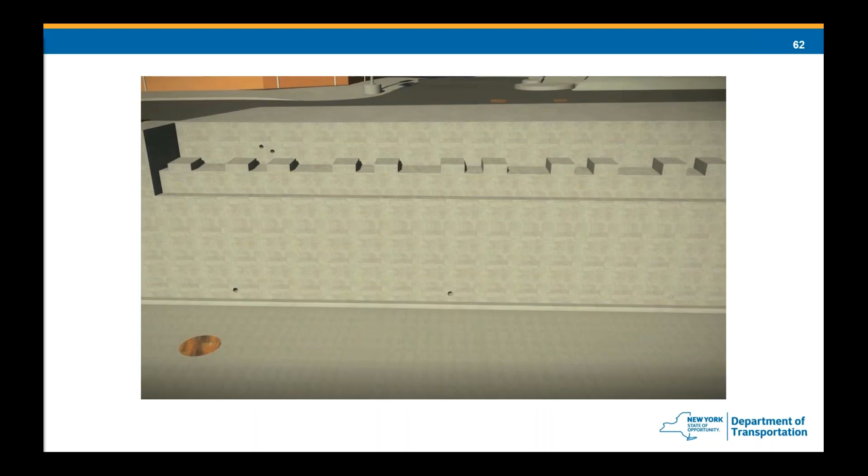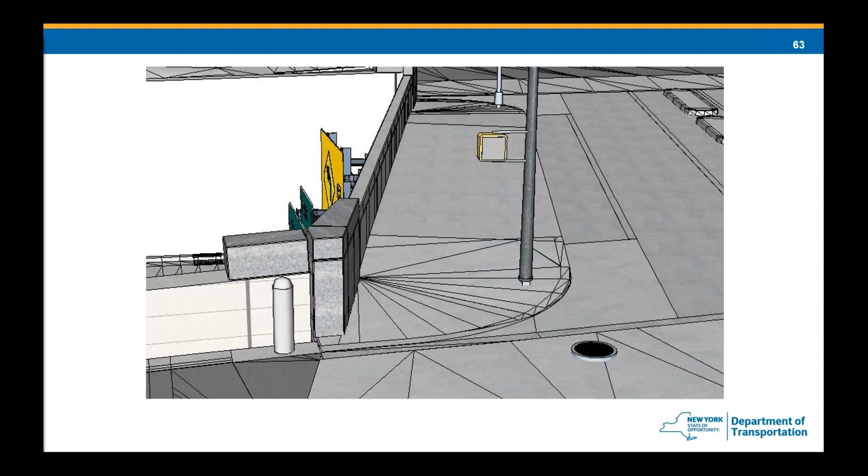Since this bridge is situated at the quadrants of a major urban expressway with ramp intersections at each quadrant, the geometric tie-in points became a major challenge. We were able to tackle this challenge with the help of 3D modeling at each unique corner of the bridge. So here's a view.

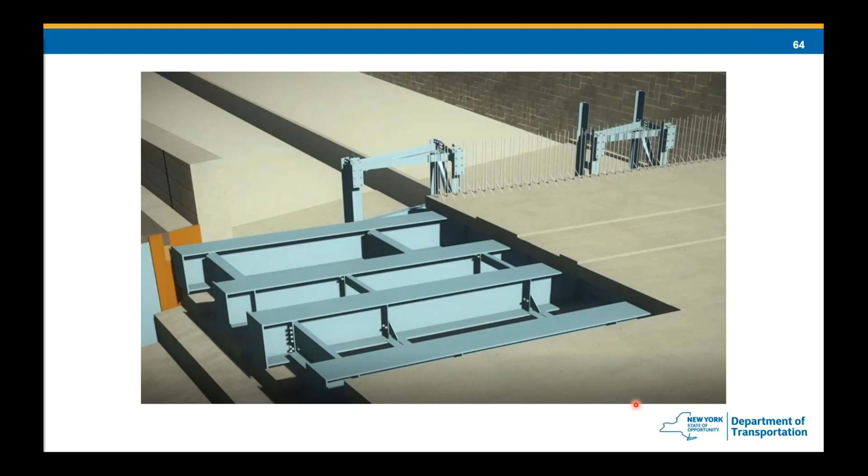This is the corners of our prefabricated modular deck beams. So this is unit 1, this is unit 2. What we decided to do is actually pull back the precast deck in these areas, so that we could satisfy the strict ADA compliant pedestrian ramp requirements.

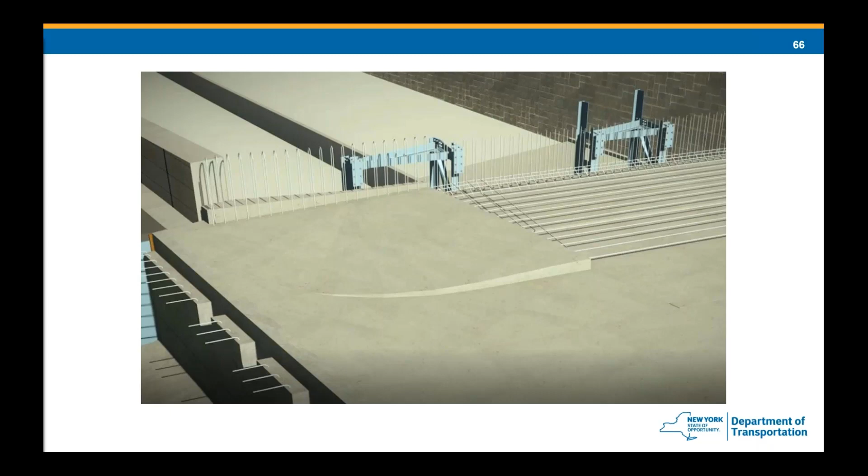So to fulfill all the geometric constraints, like I said, we held back the deck in the 4 corners of the bridge and made those cast in place. The reinforcement for these sections was placed in the field for the deck, the sidewalk ramp, and the barrier. Then all of these sections had their cast in place deck poured after all of the units were erected and the UHPC closure pours were cured.

Then we poured the sidewalk and the approach slabs, and came back and poured our barrier. We had aesthetic treatments where we added granite facing and granite blocks to tie into the historical retaining walls at each corner of the bridge. And then we finished with our final lighting, bridge-mounted signs, signals, and utilities.

I really like to stress the importance of the work that our in-house staff are doing here at New York State DOT. We were recently recognized at Bentley's International Year in Infrastructure Conference, where we received the Going Digital Award in the bridge category for the East 138th Street Bridge over the Major Deegan Expressway.

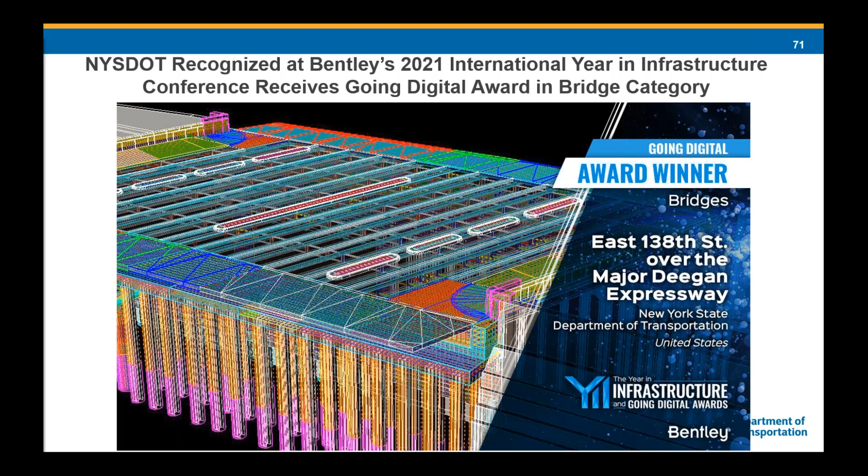Julianne: If anybody is interested in our contract documents for either of our 2 pilot projects, they're very easy to find on the internet. Just jot down the 2 contract numbers. Our first one is D264093, and our second is D264507. Once you have those 2 contract numbers at hand, do a Google search and put in New York State DOT contract documents along with the D number. That will bring you to our contracts page, where you'll be able to get the full contract, which includes the models that are the legal contract document, but it also includes all the other supplemental information that goes along with it. So if you're interested, you can see how we actually put our contracts together.

I just want to talk briefly about our future vision of digital delivery at New York State DOT. So what's really holding us back at this point? It's the lack of data interoperability that we're seeing.

There are a lot of projects going on nationwide with FHWA and AASHTO working to tackle this problem. It's a large problem. Currently there's a pooled fund study, BIM for Bridges and Structures, that is completing its first phase and starting its second phase, tackling the bridge side. There's also BIM for Infrastructure, a pooled fund tackling the highway side, and they're all working toward a standard data format, working with Building Smart, an international organization working on data standards. So there's a lot to be done, but also a lot of work happening to push everyone in this direction.

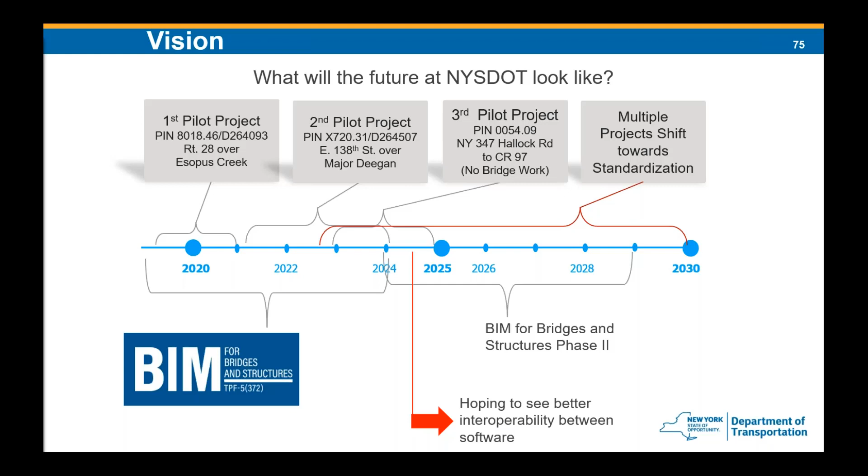We've found that model-based digital delivery is a big lift in design and construction. It can be done, we've proven that, but we're scaling it back a little to get all the low-hanging fruit for our projects and ramp up while we wait for data standards to become more used by the software themselves. We're really hoping to see better interoperability between the software in the next few coming years, and we're hoping to ramp up our digital delivery at DOT accordingly.

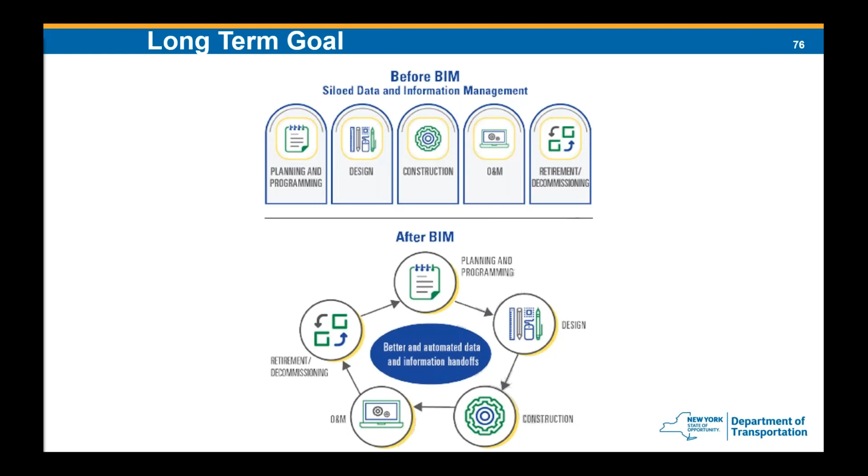Lastly, of course, our long-term goal is really to break down the silos. We have all these data silos currently where everybody stays in their lane: design puts stuff together, it goes to construction, they have to recreate stuff, and then the same thing with asset management. So really the long-term goal is to make that information flow throughout the whole planning process so that we're not recreating information as we go. That's really our long-term goal. As you can see, it's a big lift and we have a long way to go, but we're pushing and baby stepping in that direction.

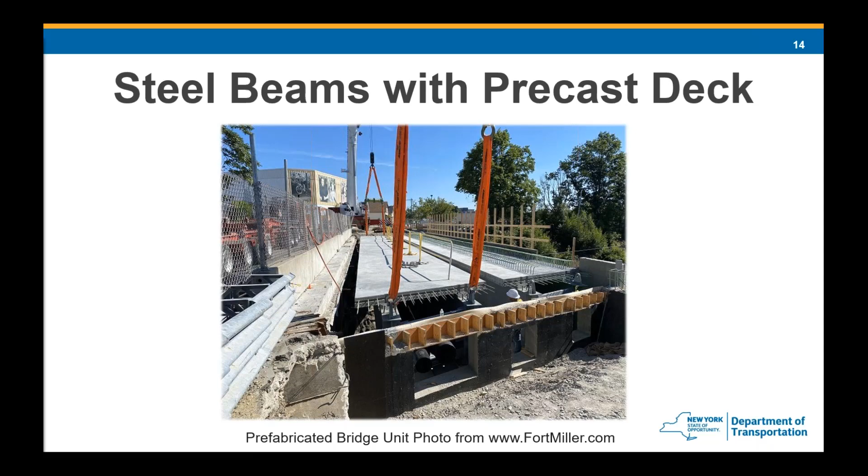The next one was please describe the reception of digital plans from the construction industry. I mentioned during the presentation that we met with our local AGC 4 times prior to advertising the project, and we got a lot of interest. There's a lot of contractors out there that were interested, and the fabricators as well - we had 5 bidders on our first project. We saw a lot of interest, and they know that we're moving in this direction, and they're really interested in what makes their work more efficient. Saving money is what makes all of our work more efficient, so everybody's interested in ways that we can do that.

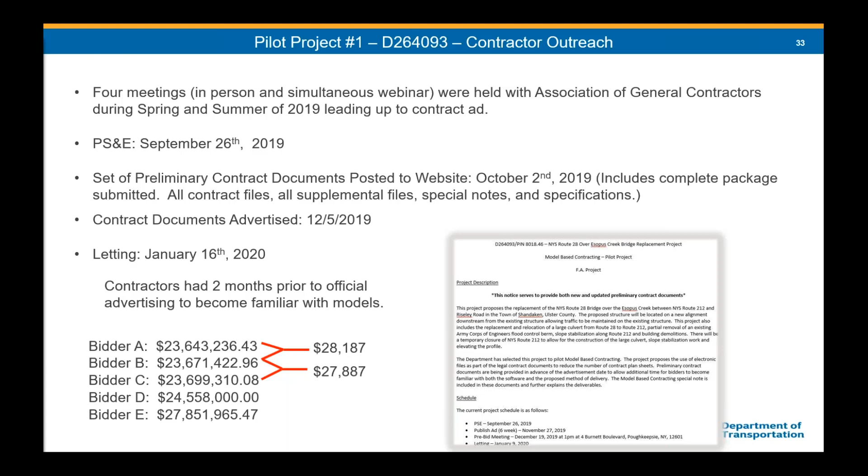Then here's one that came in during your session: with plans being digital, what do you do for as-builts? It's the question that everybody asks every time, and it's a great question. Everybody is used to getting a PDF with as-built. What we're doing is documenting any field changes that go along, so the model gets updated throughout construction if need be.

And then our as-builts are digital as-built. So the same format that we had for our construction contract is what we're going to have for our as-built plans at the end of the day. But we also consider other use cases down the road.

One of the big ones is bridge inspection. We go out every 2 years and send inspectors out to look at our bridges, and we don't expect them necessarily to jump into a giant 3D model of our bridge every time they go out there. So in this interim period, while we're still working on our information transfer for asset management, we provided a reduced plan set with typical sections and some information for bridge inspectors that they would need. So we do have digital as-built, but also supplemental information for other use cases downstream.

Let me get 3 more here real quick, and I'm going to turn it over to Jugash.

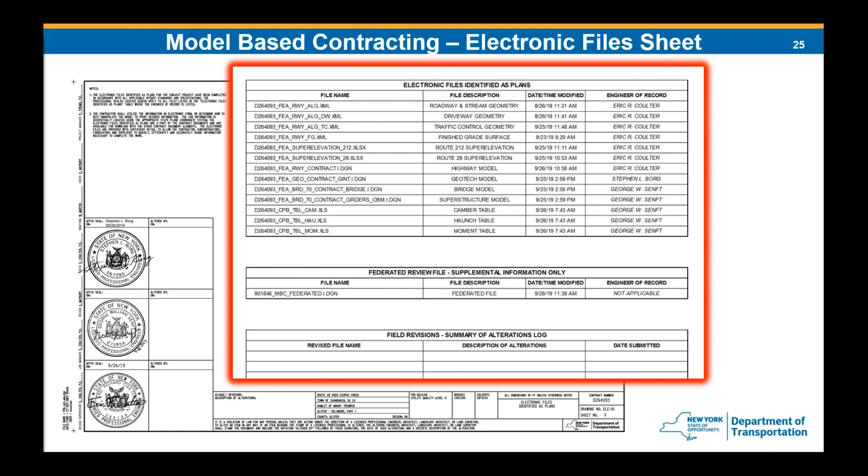First question: please describe specifications as part of the electronic plans. One of the big things we do with digital delivery is we try not to change our process - we essentially change the definition of the term 'plans' and everything else remains the same. We're not trying to reinvent the wheel or create a whole new process for every piece of the project. We had a special note in the project giving more information, but we did not have any different specifications than we normally would.

How are steel girder camber diagrams handled in 3D projects? We provided those in Excel format - it wasn't 2D or a PDF, but we provided it as an Excel sheet for the fabricator.

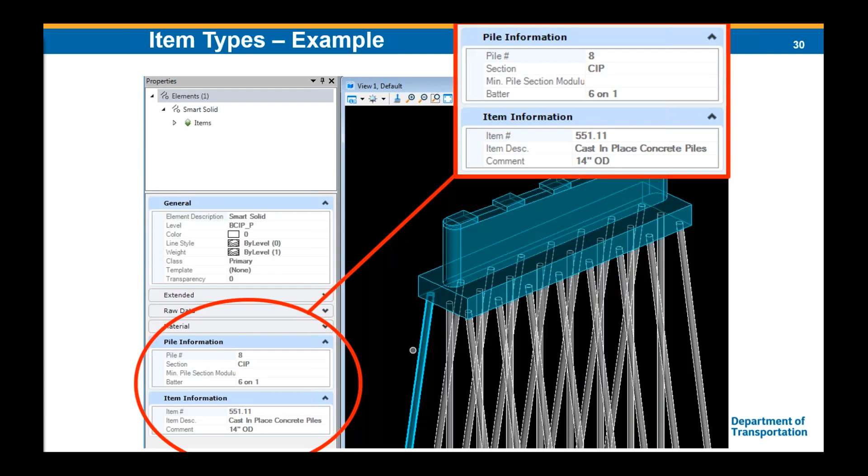Is there a way to convey the accuracy of underground utility locations, since some utilities may be precisely located while others are just estimated? That's a really good question. We spent a lot of time researching existing record plan information for existing utilities, and did a lot of field investigation to verify that information, because it was very important for this project, especially since utilities needed to go in very specific locations relative to the structure. I don't know if that's possible on every project, but for this one we had a lot of confidence in the utilities surrounding the bridge.

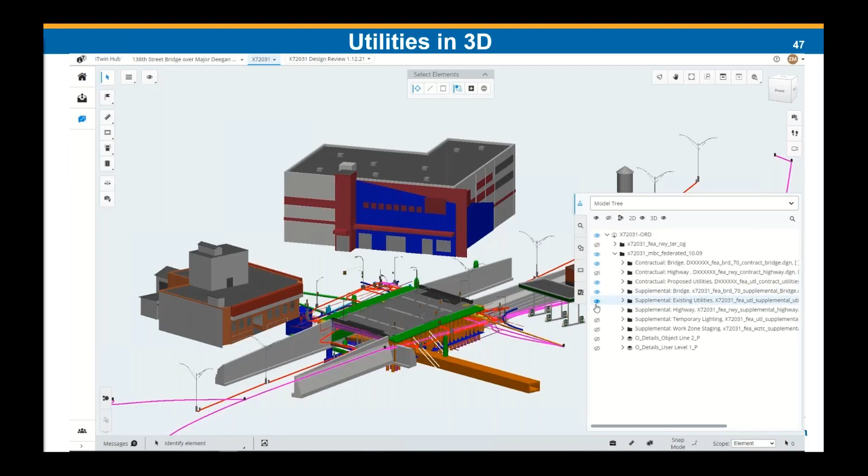Last question: what software was used by field staff and contractor for visualizing the model? They're using Bentley products - whether that's the free Bentley View product that the contractor used for the first pilot project, or MicroStation and OpenRoads, which were available to the field staff and used when needed.